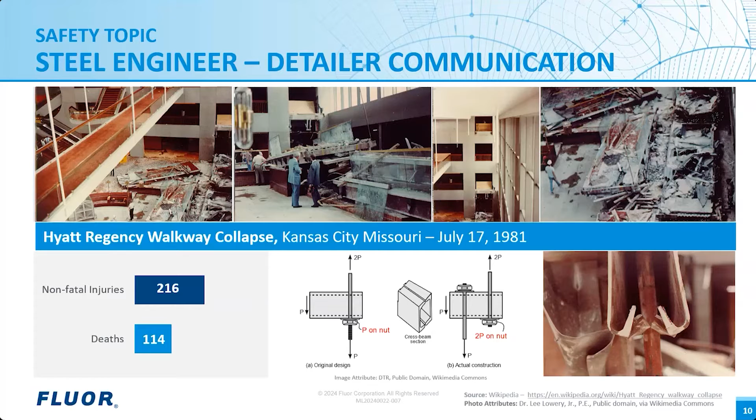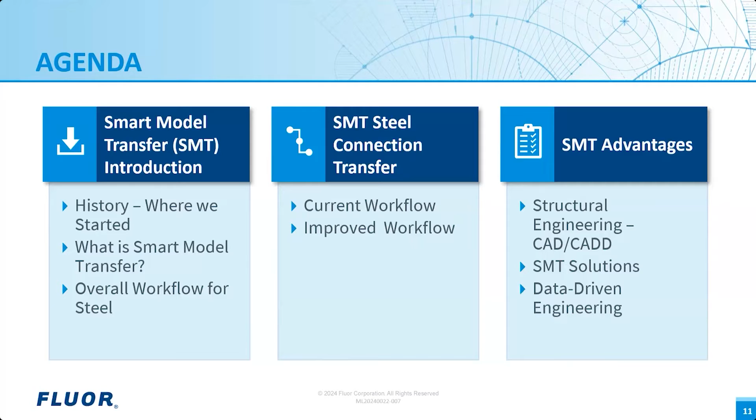This is the agenda that we'll be following for our presentation. Although SMT can be used for transferring data for many different fabricated materials, our presentation will focus on structural steel. The topics are set up in the order in which SMT is executed on a project. We will start with engineering and finish with shop drawings ready for fabrication. Along the way, we'll be discussing the innovative advances in SMT workflow.

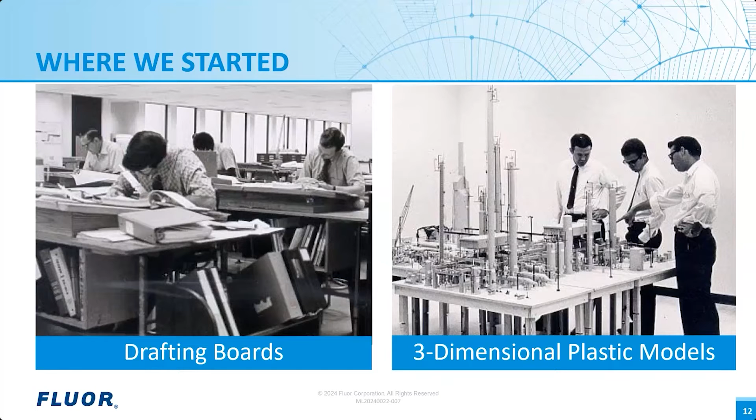We have come a long way from the days of drafting boards and paper drawings. In the past, the only way a client could visualize the final product of their facility during the engineering phase was by using a 3-dimensional plastic model, as shown in the photo. These plastic models have been replaced with 3-dimensional computer models. With widespread use of computer-aided design, drafting boards have become a thing of the past, but the manual transfer of data from an engineering company to a fabricator is still common.

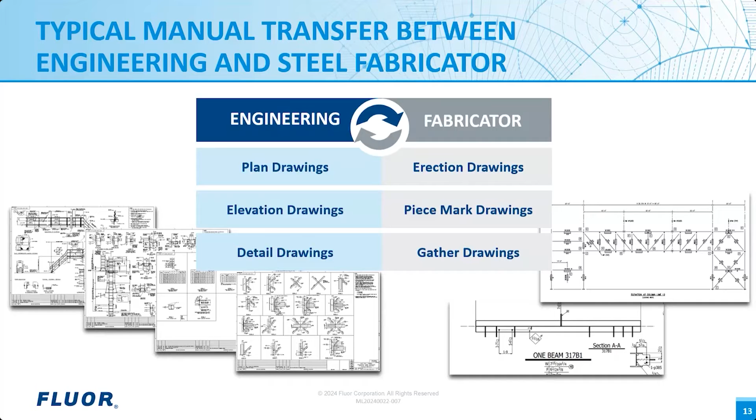A work process that is still used today involves an engineering company producing 2-dimensional CAD drawings, which include plans, elevations, and details. These drawings are released to a fabricator who produces erection drawings, piece mark drawings, and gather drawings, which are submitted back to the engineering company for review. This cycle is a manual process with the fabricator recreating the information transferred by the original two-dimensional engineering drawings in the fabricator's software and producing two-dimensional shop drawings for review.

Much like the plastic models of the past, three-dimensional engineering computer models serve the purpose of showing how equipment, piping, conduit and tray, instruments, and structural steel all fit together without clashes. It also shows the clients the space that they have for operations and maintenance. We can now take advantage of this model and add intelligence to each steel member through attributes to pass along information to the steel fabricator. This is part of the SMT process.

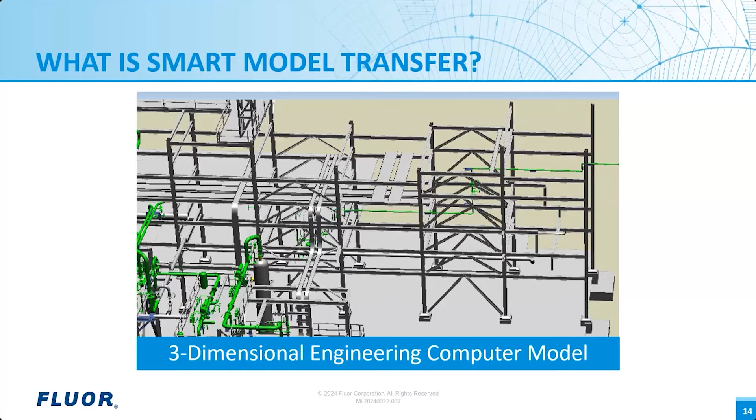So what is SMT? As mentioned before, SMT is Smart Model Transfer.

This involves creating a three-dimensional model with intelligence and the ability to transfer material data to a fabricator. The data being transferred can be materials such as piles, embeds, pipe, or structural steel, to name a few. As I said before, in this presentation, we're going to focus on structural steel SMT.

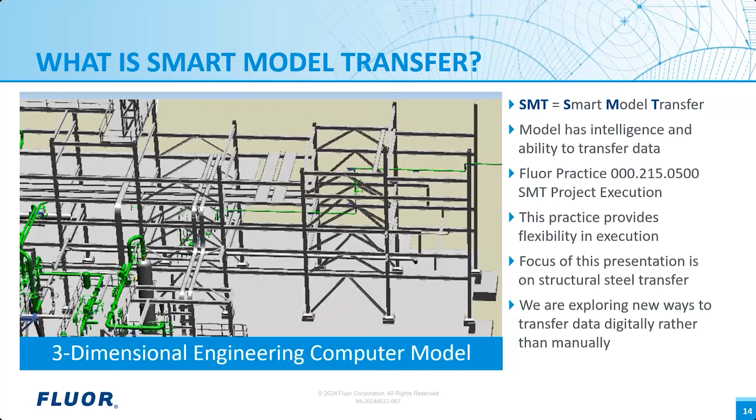Fluor has a practice for SMT execution. This practice allows us to have the flexibility to meet the client's needs and make the best decisions for a project. We strive to use the model to transfer as much data as possible to a fabricator, depending on the fabricator's capabilities. In this simplified block diagram for the SMT workflow, the red arrows indicate manual transfer processes. The green arrows indicate digital transfer processes.

The process starts with engineering and structural steel analysis. The engineering data is transferred to the three-dimensional model. The three-dimensional model is then transferred to the steel fabricator. Using the transferred data, the fabricator produces shop drawings, which are reviewed by the engineering and design team. The goal of the improved workflow is to eliminate as many manual transfer processes as possible to reduce the possibility of miscommunication and translation errors.

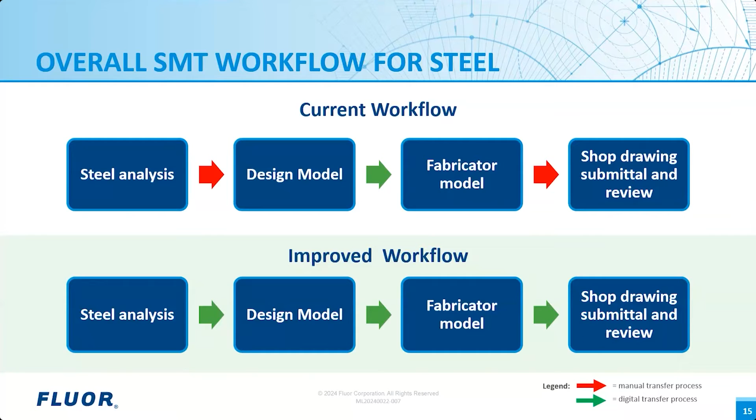Jonathan Litoff will now present some innovative ways we are converting manual data transfer processes for connection information to digital transfer processes. Thank you, Eric, for providing an overview of Smart Model Transfer and the SMT workflow. The transfer of steel connection data from the engineer to the fabricator works in the same way as the transfer of all other structural steel data.

When we're talking about transferring structural steel data, we're actually referring to each structural steel member's shape, material and grade, their start and end coordinates and their geometry, the steel member's rotation and orientation, and also their start and end frame connections, which provide information on how the steel connects within the structure. Each steel member, whether it is a column, beam, or brace that connects to another structural member, will have a connection code attribute assigned in the 3D model.

When Smart Model Transfer is utilized on a project, all of this data is stored in the model and can be extracted and sent directly to the fabricator in an electronic file, providing the fabricator with the information required for them to fully detail the steel connections, create a fabrication model, and also create shop drawings. The utilization of Smart Model Transfer can eliminate the need to produce many two-dimensional steel drawings, potentially reducing the number of engineering structural framing drawings by roughly 90%. However, with big data comes big responsibility, and it is imperative that the data is accessible, manageable, and able to be tracked.

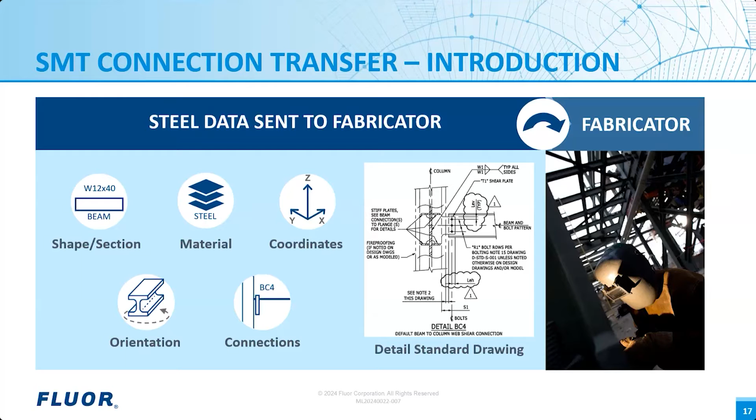On a typical project that utilizes smart model transfer, the process begins with the engineer analyzing and designing the structural steel and steel connections. The engineer then provides this information to the design team to get the steel data incorporated into the model. A typical way that the engineer would communicate this information is by producing engineering sketches or drawings, which will then be incorporated into the model. Design would then add the steel from these sketches or drawings into the 3D model.

And this is very rarely the final step in the process, since we all know design changes are very common and things can change as more information becomes available and as anticipated loading magnitude and locations may change. As more information becomes available, the engineers and designers will review the structural steel data in the model and make revisions as necessary. On projects utilizing SMT, where the structural data is stored in the model, a common way that this is handled is by generating auto sketches or two-dimensional drawings from the 3D model for the structural engineer to visualize the steel data during their review.

The engineer can then mark up these sketches and drawings with their comments and send them back to the design team. And the design team would then reference the engineer's comments and update the model accordingly. This process is considered smart model transfer because the engineer and designers are working together to input, review, and revise this information in the 3D model, and then transmit this data electronically to the steel fabricator. However, since we're taking a data-centric approach, SMT affords us significant flexibility regarding how we actually get from point A to point B.

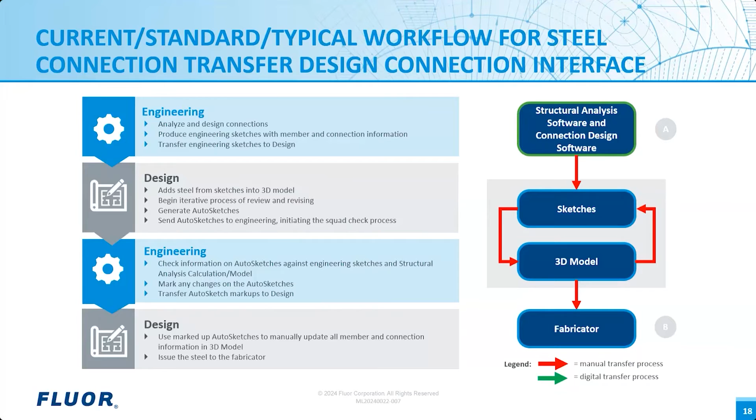Because smart model transfer is data-centric, the workflows are essentially future-proofed since they are very versatile and adaptable, and we can do useful things with this data. For example, we're able to export the data from our structural analysis software and import it directly into the 3D model. In the right situations, this is a significant improvement in reducing manual efforts.

And not only is this a significantly more efficient use of the engineers and designers' time, but it also eliminates the chance of any unintentional errors or miscommunication occurring when updating the model per the engineer's design.

Now, arguably, the largest part of this process is in the iterative review and revision steps. During these steps, design changes are common. Anticipated loading magnitudes and locations may change, which could result in the engineer needing to add or remove structural steel, revise steel shapes, and increase the capacity of some connections.

One improvement that we've implemented is exporting the structural steel and connection data from the 3D model and importing it directly into the same structural analysis software that was used as part of the structural engineering calculations, as illustrated on this slide. Since the structural data is stored in the 3D model, we are able to access this data on demand and reformat the data to accomplish this as an alternative to producing two-dimensional drawings from the model for the engineer to review.

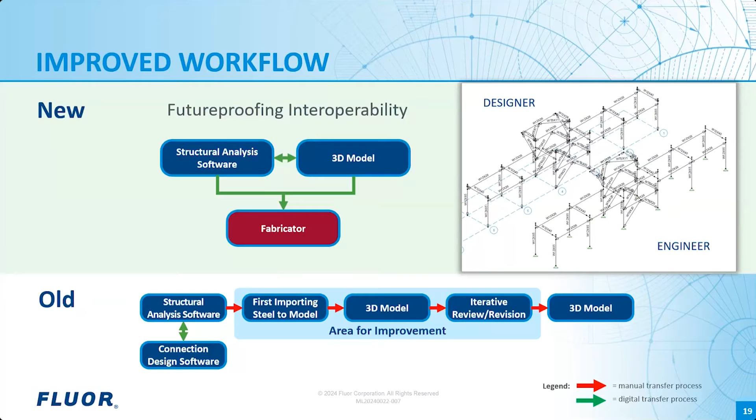And now I'm going to pass it over to Lorne Jensen, who will share his expertise on smart model transfer and review additional ways SMT is utilized by Fluor and the steel fabricator. Lorne, over to you. Thank you, Jonathan, for providing an overview of automated connection call-out workflow between the analytical and the design model. I think this will make an excellent addition to the SMT suite of tools available to projects today.

Looking back, the Cartesian coordinate system and descriptive geometry were invented back in the 1600s and are the basis of scale drafting today. The structural engineering drawing shown has been the proven method of communication in the industry, and drawings were either manually drafted by hand, 2D CAD, or 2D CAD extracted from a 3D model. Revision control was done manually by placing clouds around the modified items, and references to other drawings and details were used to show more information.

Engineering notes saying typical 3 places or similar required the steel fabricator to interpret where the other locations are and what is considered similar. 2D drawings are prone to shortcuts being taken because of their flexibility to edit information directly on the drawing. A single project can have many structural engineering drawings, all which need to be managed by engineering and issued via document control.

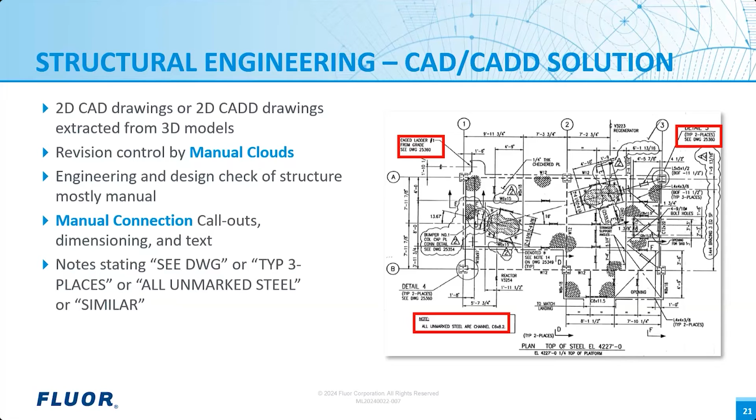When drawings are extracted from 3D models, engineering could provide the 3D model to the fabricator as information only, since only the drawing is the stamped governing document. This would require the fabricator to remodel the structure using stamped engineering drawings, or start with an unofficial 3D model. This can take multiple days for the fabricator to rebuild the model before detailing can start. Structural engineering drawings still have their place in industry. However, they do require effort to create and can have quality issues when not maintained.

Smart Model Transfer, referred to as SMT, is a Fluor CSA work process that transfers engineering information to the steel fabricator via open source data formats. SMT enables the steel fabricator to import the official stamped engineering models without the need of drawings.

SMT uses CIMSteel, or sometimes referred to as CIS/2, which is ISO compliant and was specifically designed for the development of structural steel engineering data. CIMSteel is an open source format that started in the early 1990s. Today it is endorsed by NIST, AISC, CISC, European, and all major software vendors for structural steel.

Fluor's first SMT project was in 2014 and won the Tekla North American BIM Award for Modularized Industrial Project. This winning project was 500 tons of modular steel with no structural engineering drawings, no RFIs, and ahead of schedule.

SMT builds a digital twin of the structure. All key information is within the SMT data. This opens the door to high-level machine learning and automation of routine engineering checks. SMT enables open accountability to prove that something has been done and how it has been done. Today, we will focus on transfer of structural steel, but other aspects of SMT, such as architectural, piles, and earthworks, are all part of the Smart Model Transfer family.

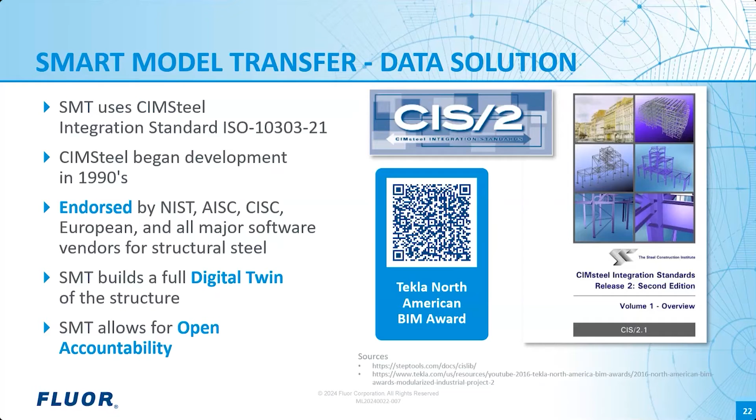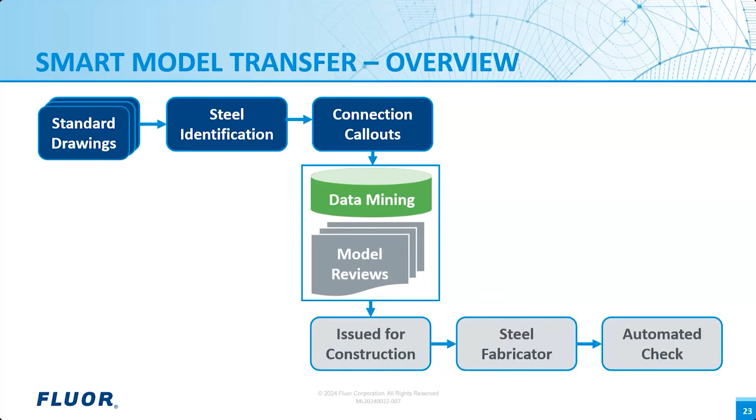Now we'll take a more in-depth review of the key steps of the SMT work process, which Fluor uses on projects today. This includes standard drawings, steel identification, connection callouts, data mining, and model reviews, along with issued for construction, steel fabricator, and the automated check. These steps can be adjusted based on the project connection strategy, whether it's done in-house, by fabricator, or third party. Also, if the project is modular, stick-built, or a variation of multiple fabricators being domestic or international. And lastly, if the steel is managed by Fluor or the client.

Structural engineering standard drawings are a key to the SMT project setup and need to be fully incorporated into the model catalog. This ensures objects modeled automatically align to the standard by default. Items such as stairs, ladders, handrail, and flooring see large benefits in being well defined in the catalog.

It is recommended the project steel table be limited to identify what is available from the fabricator, along with steel that may require a longer lead time. Material grades and coatings need to be assigned to the model to track items such as stainless steel, fireproofing, galvanizing, and painting requirements. Proper catalog configuration provides engineering the ability to pass significantly more information to the fabricator. This additional effort to configure the engineering catalog benefits engineering and all downstream consumers.

Modeling tools such as Smart 3D has a live central catalog and model database shared across multiple global offices within a single project. File-based systems can require extra effort to maintain and ensure the model is always up to date bidirectionally. This may sound achievable and possible, but to sustain a file-based system throughout the entire life of a project, it does take effort to ensure the sync is always working.

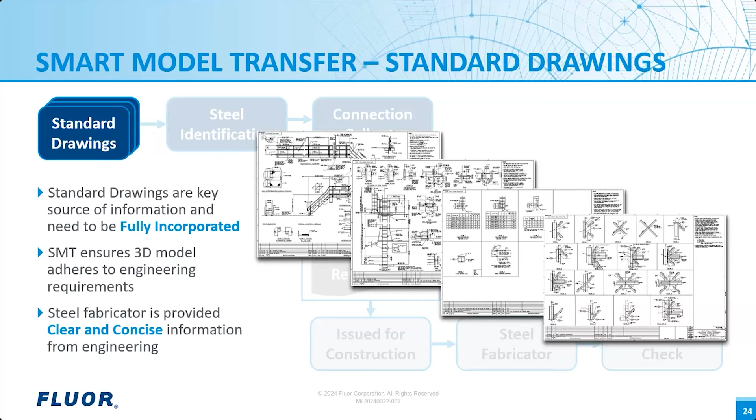After the first issuance of the structure, Fluor's internal SMT tools automatically report all revisions to the structure since it was last issued. This report is provided to the structural engineer for review and their approval to ensure these additions, modifications, and/or deletions are the ones they requested.

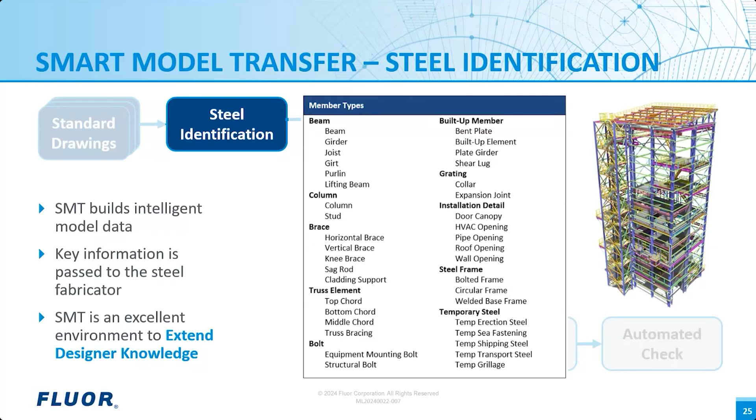Another significant benefit of SMT is the increased level of detail the model enables designers to learn more about structural design, fabrication, and construction. SMT has become an excellent learning tool to extend designer knowledge.

Prior to the award of the contract to the fabricator, each fabricator needs to be pre-qualified for the SMT capabilities, and those findings should be included in the technical evaluation. SMT needs to be written into the fabrication contract as well to ensure the work process is adhered to.

Connection assignments in the model can be connection callouts from standard drawings, project-specific details, or the fabricator's connection library. SMT is also flexible to have a combination of connection callouts or connection forces applied to the model, which allows the fabricator or third party to engineer the connections. Prior to the issue for construction, engineering will validate and approve connection assignments using Fluor internal tools. The SimSteel file is then stamped by engineering and issued to the fabricator with connection information embedded.

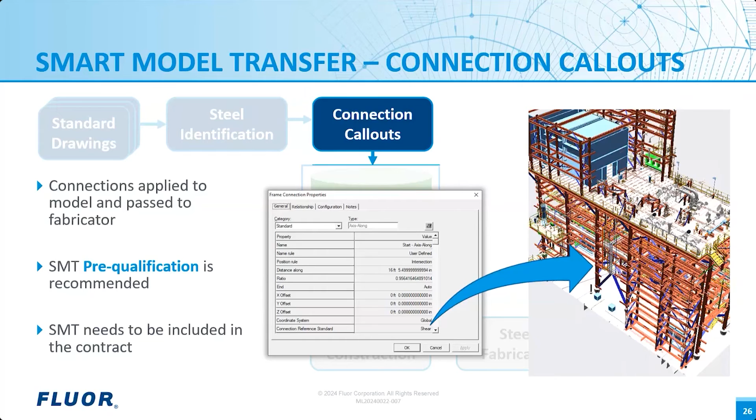For data mining, it is best if the structural engineering model can be accessed via a live central repository. This ensures engineering has a single source of truth to review data via web-based graphic dashboards, lookup tables, and filters to isolate structures. Dashboards automatically flag engineering validation issues to allow designers to do their own self-checks.

A key part of SMT work process is the ability to automatically identify engineering modifications to the structures, which automates revision control. This greatly reduces cycle times to issue revisions to the fabricator. We have seen cycle times reduced up to 80% when compared to issuing traditional engineering drawings.

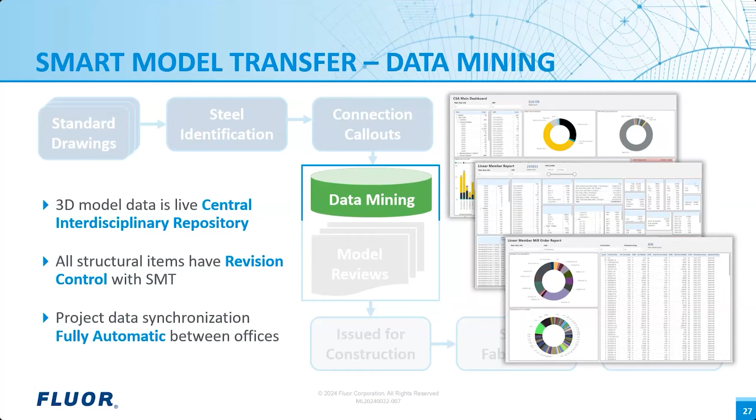When dealing with big data and data mining, it is important to note Smart 3D uses an open source SQL database, which allows for a wide variety of software services, apps, and connectors to work together. This provides the ability to turn unrelated sources of data into coherent and visually interactive insights.

For SMT internal squad checks, Smart Review or an equivalent is used. This model session file is submitted to document control for other engineering disciplines to review and sign off. Comments are added and tracked with internal tools to ensure they address the before and after snapshots with any additional information. The updates to the model are then reviewed for approval.

The squad check model session has more information than traditional structural drawings, since it is multidisciplined and a static snapshot in time, which fully represents the structure at the time of review. The usage of model sessions for squad check is a proven work process that's already well established for client reviews, and now is incorporated into the SMT work process.

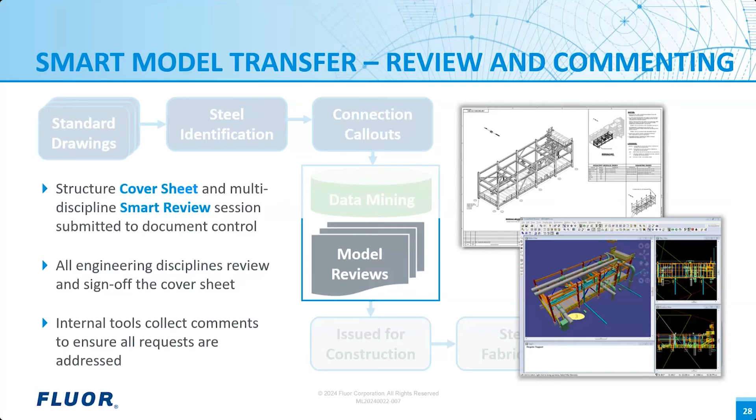SMT has been used for all structure types across all Fluor business lines, including energy solutions, urban solutions, and mission solutions. To date, we have issued SMT structures as stick-built, modular land transport, modular ocean transport within greenfield or brownfield project sites. As mentioned earlier, each structure is packaged with one cover sheet drawing, which corresponds to one individual work breakdown structure, or WBS.

The isometric cover sheet is mostly automatic, with only the general notes and reference tables being added manually. Additional engineering drawings can be added to the package for structural details that are too time-consuming to model or too complicated to communicate via the model.

This could be a floor plate that has seal welding around it, but it's only partial. It's easier to draw a detail and create a drawing of that and pass it to the fabricator.

SMT has reduced structural engineering drawings by 90%, which is a significant reduction in effort for designers in the preparation and management of drawings. This has also reduced the effort for document control, since they no longer need to push a large number of drawings through the system.

The SMT cover sheet contains all the information needed for the fabricator to import the engineering model and start detailing. This includes the SimSteel file, revision identification, and associated reference information.

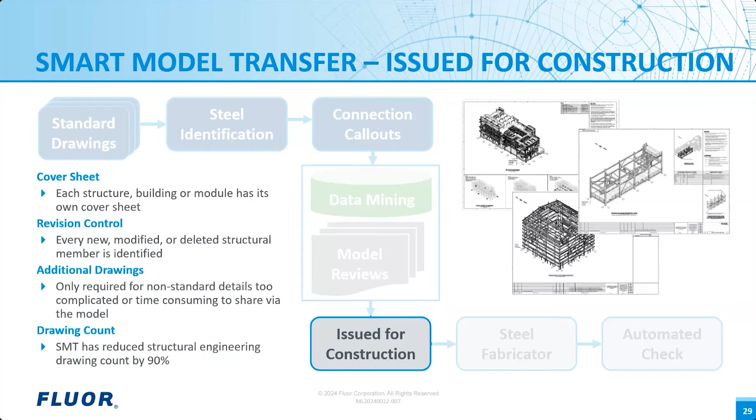Once the SimSteel file is imported by the fabricator into the fabrication model, engineering and fabrication models now become synced. Any future modifications loaded via the SimSteel file automatically update the fabrication model when imported.

The Institute for Research in Construction stated in 2010 that most of the savings with transferring engineering model data to the fabricator would occur with steel detailing. We could see a reduction of detailing effort of 20 to 40%, and that engineering model data would provide the steel fabricator the ability to get quicker quotations, faster detailing, earlier material orders, and reduced human errors.

Today, in 2024, our experiences with SMT have shown these estimates are true. Here's an example from a project.

We took a very large ocean transport module, or VLM, weighing approximately 3,500 tons, with dimensions of 70 meters long, 27 meters wide, and 25 meters high, which contained over 10,000 structural modeled objects.

This single VLM was over 1.2 million rows of SMT data, which was fully imported into the fabrication model in less than one minute. Once imported, the steel detailing could proceed, since the SMT is the official engineering data we transfer to the fabricator. This is a significant savings in steel detailing effort for the fabricator.

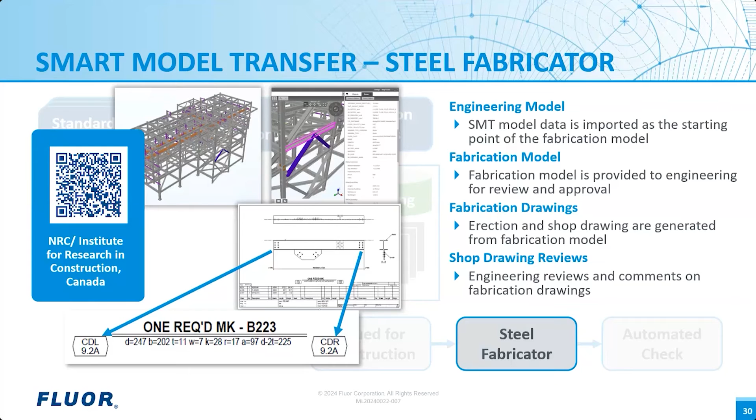There are various levels of automation skills among steel fabricators related to their steel detailing capabilities in SMT. Fabricators which have invested in automation and work process refinement have embraced the SMT work process and seen its benefits for themselves.

It cannot be overstated that with big data, you need big solutions that are proven and scalable. Manual validation is extremely difficult, complicated, and not recommended with SMT. Data must be presented in a structured format to allow for proper controls and analysis.

For SMT, we have developed work processes and automation tools which validate, manage revisions, and ensure data exchange protocols are being followed for every steel release. Once the fabrication models are ready for review, the steel fabricator provides engineering the first pass for commenting, which is prior to any erection and shop drawing creation.

Fluor SMT tools can automatically find the differences between the engineering model and the fabrication model. This provides engineering the ability to check structural engineering members using machine learning. Here's an example of how Fluor SMT tools can do this.

On an energy solutions project with 10,000 tons of steel, there is approximately 42,000 structural steel members. With each structural steel member having 2 connections, there is approximately 84,000 engineered connections assigned. Our SMT tools can verify multiple key points between the engineering model and the fabrication model, such as size, rotation, and points in material selection.

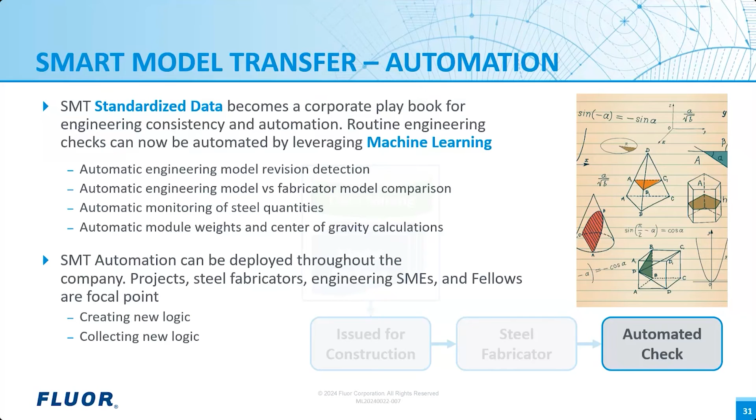This is over 290,000 automated checks on 10,000 tons of steel because of big data and machine learning. Any differences found are provided to the engineer for review.

All downstream consumers and activities which handled the structural engineering drawings in the past have now greatly reduced in effort because of the SMT reduced drawing count and automation. SMT has proven it can reduce effort, increase quality, and better manage change, along with preparing CSA for future and data-driven deliverables.

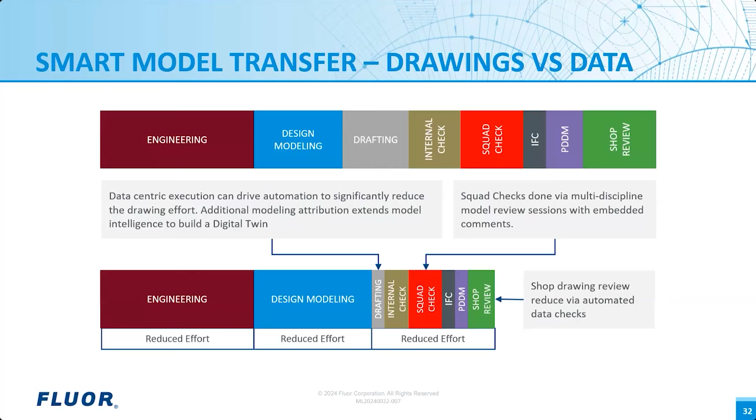The ability to have centralized, retrievable, and standardized data is what projects and the industry needs. Fluor has developed a global engineering data standard which supports all consumers of engineering data. This data standard ties to our core tools such as Smart 3D.

Digital transformation enables us to integrate and organize data from FEED, detailed engineering, procurement, fabrication, and construction. Fluor's data-centric execution strategy is based on data standardization, data collection, data quality, and data management.

CSA uses big data to openly share engineering information with other disciplines, management, and subcontractors. The future intent is to develop a concept of a smart project in which engineering shares most of its information via data and not Excel files or manually marked up documents.

Today, with SMT, there is no need for other disciplines or management to wait for drawings. The SMT workflow allows for data to be accessed via the model or live dashboards. Data can be sorted as either working or approved for consumers to develop their own insights.

When sharing data, there are 3 key components which must be followed. First is the network. There must be a digital backbone solution. The data can be used by various applications.

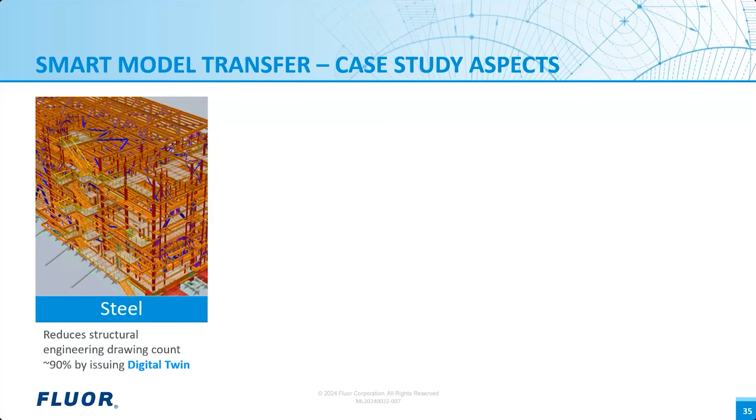Next is architectural. While using Smart 3D on energy solution projects, architectural model data was exported and stamped by engineering, which was provided to subcontractors with no drawings. Local permitting was required, but of much less detail than full architectural drawing packages.

The architectural model was a full digital twin with weight, fabrication requirement, revision control of each modeled object. The weight information was needed to calculate the total weight and center of gravity of cladded modules.

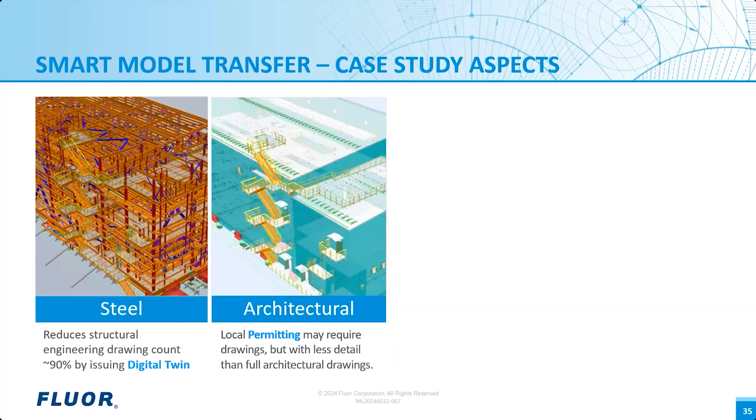Another area for smart model transfer has been piles. Only the model was used as a deliverable, which included revision control of each pile. The model pile includes all the required information for procurement, fabrication, and installation. This method allows for the pile data to be loaded directly to the survey total station to stake pile locations. To date, we've issued, purchased, and installed over 5,000 piles via data, along with the elimination of pile schedule drawings.

And lastly, civil. For civil, we have earthworks. Rough grading models can be exchanged today using industry standard formats that can be loaded directly into survey total stations and machine-controlled excavation equipment. Not widely used at this time due to contractor selection, but this technology reduces field layout times, eliminates over-excavation, eliminates human error of data entry, can verify grade and angles, and lastly, monitor progress of earthwork at the construction site in real time.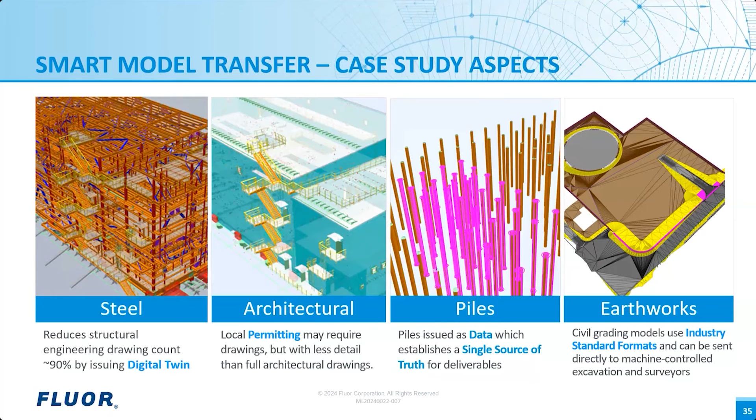Successful data management can provide more accurate and precise information, which can reduce engineering cycle times, reduce claims from construction, reduce RFIs from fabricators, reduce vendor schedule, and reduce human errors. All of these reductions contribute to increased safety for the project.

Fabricators have indicated they have seen benefits of SMT since they can talk over the model and resolve issues more effectively because of the level of detail provided in engineering model data. Fabricators have stated there is a reduction of cycle times up to 2 weeks because of elimination of early erection and shop drawings for review, and instead utilizing the fabrication model. A significant reduction in drafting RFIs due to the clarity of SMT model data, and that SMT is a better way of communicating connection loads and design information to the fabricator.

Revisions can be accessed quickly and efficiently, and fabricators can quickly quantify specialty items such as embedded plates, Teflon slide plates, equipment bolting by allowing us to access the materials directly from the model. All consumers benefit from SMT data since they are provided the data they need in the format they can consume.

As a last note, the generation just beginning to enter the workforce has grown up with the digital devices and may have never known a time without high-speed internet. A world of information, entertainment, and digital content has always been at their fingertips. A data solution like Fluor's Smart Model Transfer is a natural transition to the up-and-coming engineering workforce.